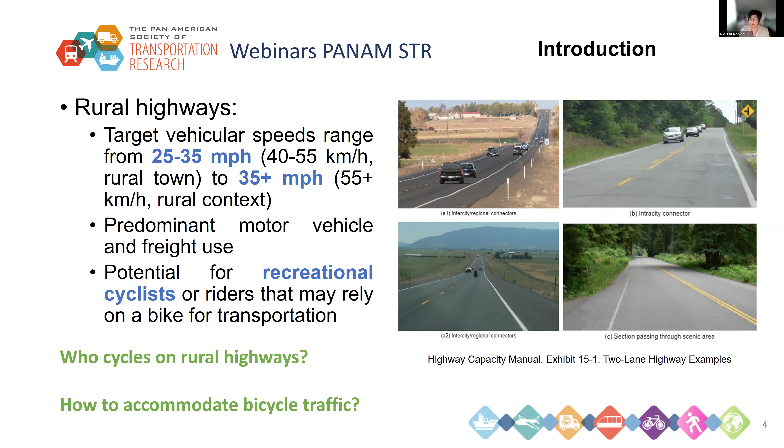Still, there's also potential for recreational cyclists who want to cycle on rural highways, and also riders that might rely on the bicycle as their only transportation mode. So we're not talking only about leisure cycling, but it can also be commuters or other purposes that use the bicycle. The main question is actually who does cycle on rural highways, in the context of the US, and how can we accommodate bicycle traffic on these types of roads?

How this has been done in the past is that we have different design guidelines, in the case of the US, that were developed to see which are the most suitable conditions for cycling for a specific design user profile.

What I'm bringing here is the FHWA bikeway selection guideline that, for the rural context, says how the width of the shoulder should be, between 1.2 or 1.5 meters and almost 3 meters, depending on the vehicle speed and also the volume. The more volume and the more speed, the higher the accommodation should be for bicycle traffic.

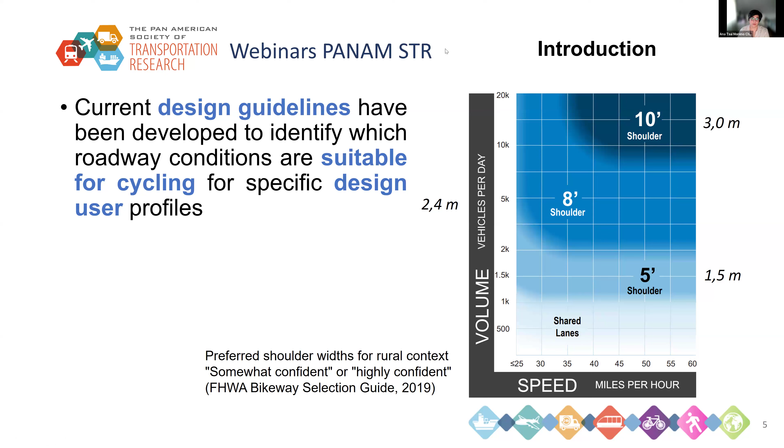We said that it depends on the target user. This is a new concept that's been implemented in the US for almost the last 10 years: not targeting the entire population, but targeting a specific user segment. Those segments are based on comfort level, bicycle skills, or experience.

In the case of rural highways, we cannot imagine that all the population would cycle on a rural highway. So all this design criteria implemented in the past is targeting the most confident groups. In the case of FHWA, that's the somewhat confident and the highly confident. Looking at population percentages, we're talking about 10 to 16% of the total population. So it's a niche, I would say - it's not intended for all cyclists or all the population to cycle on rural highways.

All this distinction based on the level of confidence follows the approach of the level of traffic stress. This approach started in the 90s with Sorton, who proposed whether a facility was adequate or inadequate for a cyclist based on their own perspective.

It gained popularity in the last 10 years after the Mineta Institute started creating easy lookup tables to define the design criteria. These are basically mainly based on expert opinion.

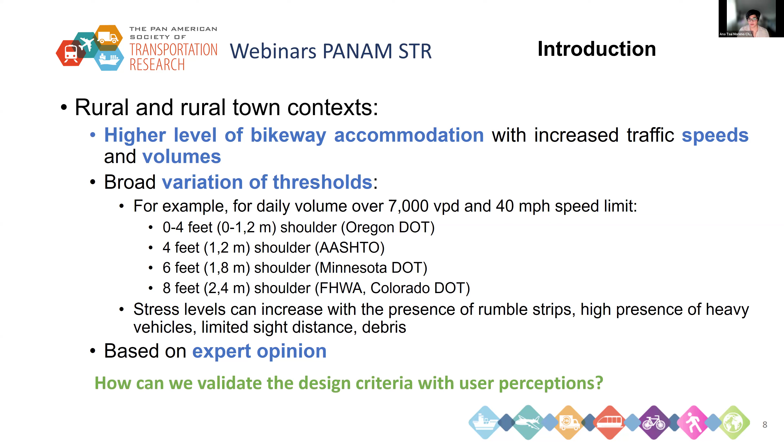So the main question here is: how can we validate these design criteria not only based on expert opinion, but with user perceptions? This is what brings us to our objective today - to develop a framework to derive design criteria on rural highways based on empirical data.

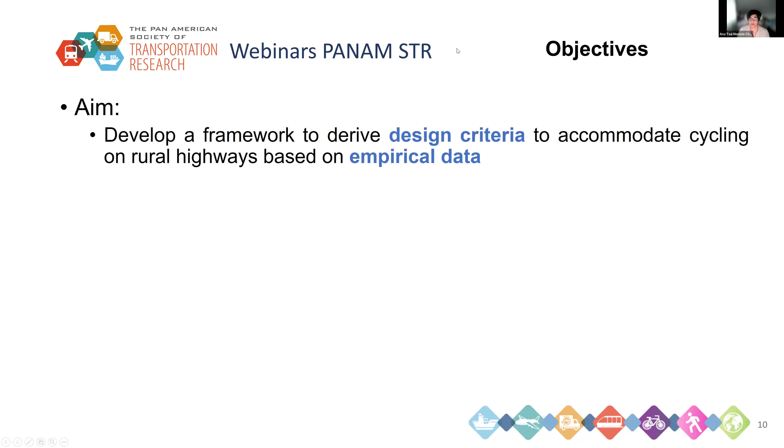To achieve this aim, we have a series of subsequent objectives. First, design the survey to know and gather which variables influence people's decision to cycle or not. Then distribute this survey to collect opinions from actual cyclists, along with their attributes and characteristics. From there, estimate individual preferences.

Lastly, develop recommendations for the level of traffic stress based on user perception. To the best of our knowledge, this will be the first attempt to derive design criteria based on user perception and empirical data.

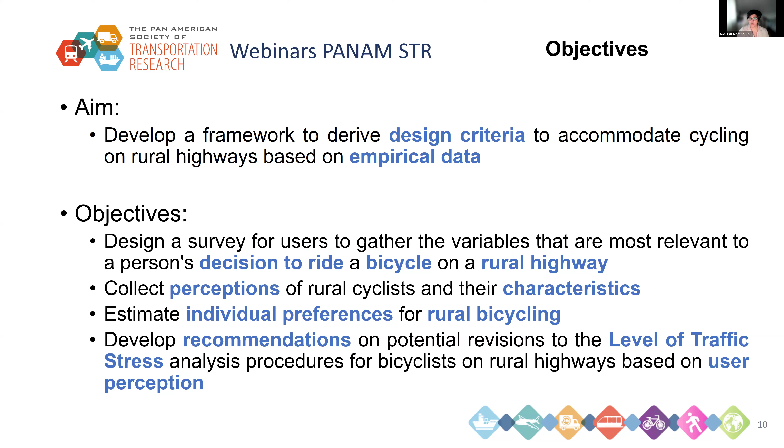What we can see is that all these methods have been developed concurrently over time, so there isn't an official position on whether to use level of service or level of traffic stress. There's a lot of debate on which one to use and which is more appropriate, because all of them have been developed concurrently.

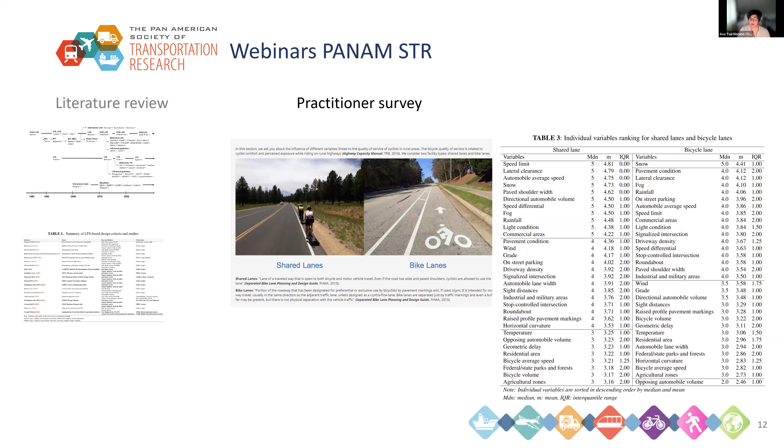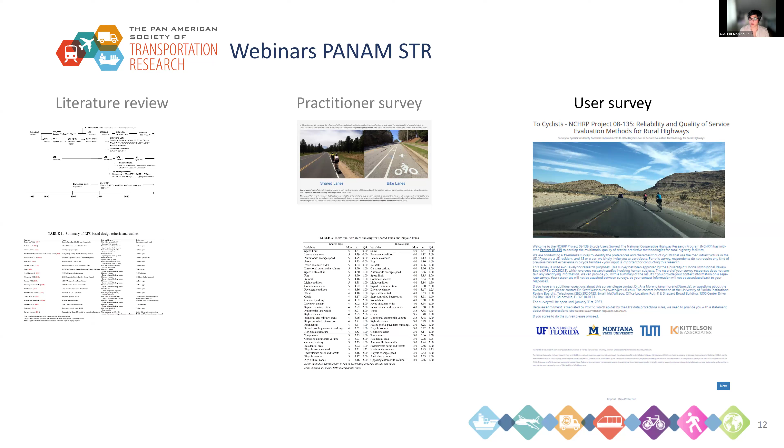Based on the practitioner survey, we developed our user survey, which is what I'll talk about today, because it involves empirical data with user perceptions. This survey was part of our NCHRP project with our partners. It's a stated preference survey conducted online, and the main objective was to identify the variables relevant for a person to decide whether to cycle or not on a rural highway.

The survey has different pieces, but what I want to talk about today are the choice experiments that were developed. The survey was pre-tested with the team and project partner members, and had approval from the University of Florida IRB. After that, it was distributed online to cyclist associations, social media, UTCs, state DOT bike-ped coordinators, and different committees at TRB, since our sample target was in the US.

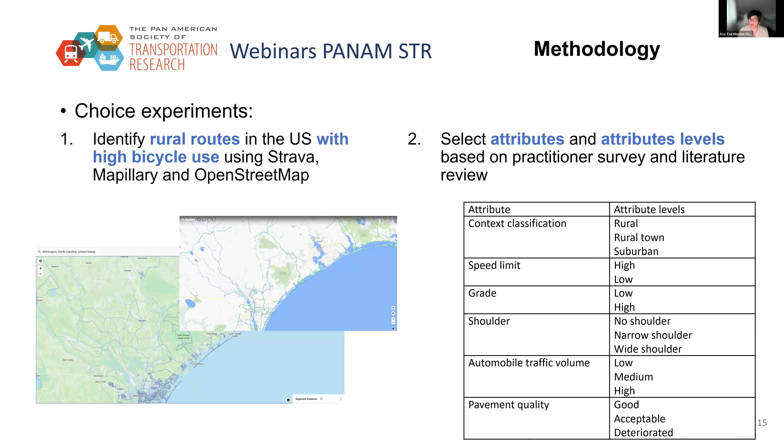We have 6 attributes to combine for our choice sets, each with 2 to 3 attribute levels. If we did all combinations of these 6 attributes with their levels, we'd end up with 324 alternatives—something not feasible for a participant to analyze one by one.

So we used fractional design to reduce the choice task dimension from 324 alternatives to 16 representative alternatives. And these are the ones that you can see here on the slide. They vary the context class between rural, rural town or suburban, a speed limit low or high, the grade or terrain, the presence of a shoulder, automobile volume, and pavement conditions.

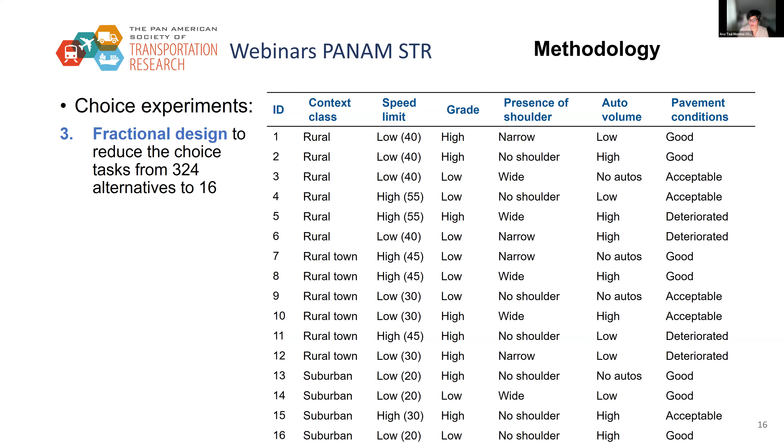So these were the descriptions of the different scenarios, but instead of showing each person a description, we showed them a picture. And how we created the picture was retrieving video images from Mapillary to create those hypothetical scenarios, using streets or highways from the US. And then we edited the speed limit signs, automobile volumes, and also pavement conditions.

And here we have an example of two of these choice sets, and one would be image number 4 that had no shoulder, low traffic volume, a high speed limit, acceptable pavement, and the terrain is level. And then on the other one, you can read them faster. So here we can see the differences that were edited for the people.

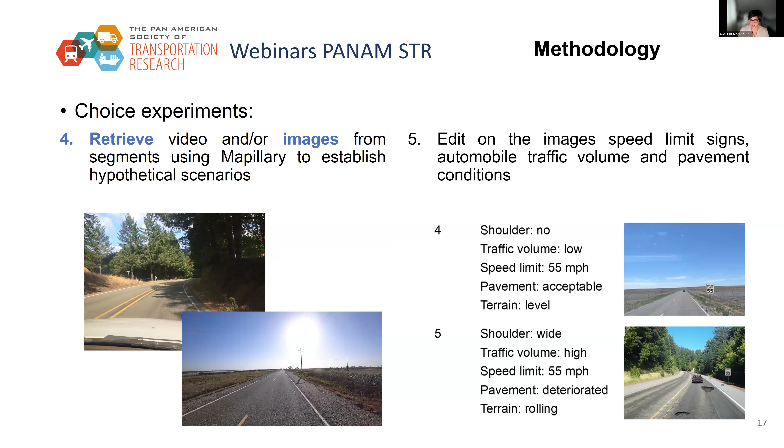So once we created these 16 scenarios, we implemented all of them in our LimeSurvey, and we divided those scenarios in 4 groups of 4 choice tasks. So each choice task had 4 alternatives, and those groups or choice sets were created randomly. So each person had a different order and a different arrangement of the choice sets, but each person was able to see all 16. That was ensured in our code.

In order to increase the sample size, we did the choice sets twice. So each person had to do 8 choice sets in total.

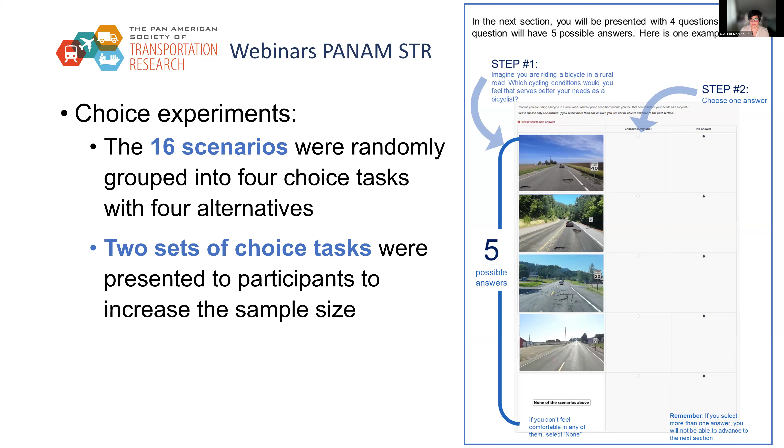And for the modeling framework, here comes the specific improvement compared to the NCHRP project that we were working with: instead of using multinomial logit or nested logit, we went to a mixed logit model. In this case, the mixed logit model used a distribution of the taste parameters for the design attributes over the entire population, and that distribution was assumed to be normal. So instead of having just one for each segment of the population, we have an entire distribution of the taste parameters. So they were at the individual level.

It was estimated using Markov chain Monte Carlo methods in Biogeme, and this is useful when we have multivariate distributions that are unknown. Specifically, we were able later to evaluate individual level taste parameters. After the estimation of the mixed logit model, we have all these distributed taste parameters, and using simulations, we were able to derive the individual beta value for each one of the parameters for each one of the persons. This methodology was previously used by Hensher to evaluate willingness to pay estimates for each person individually.

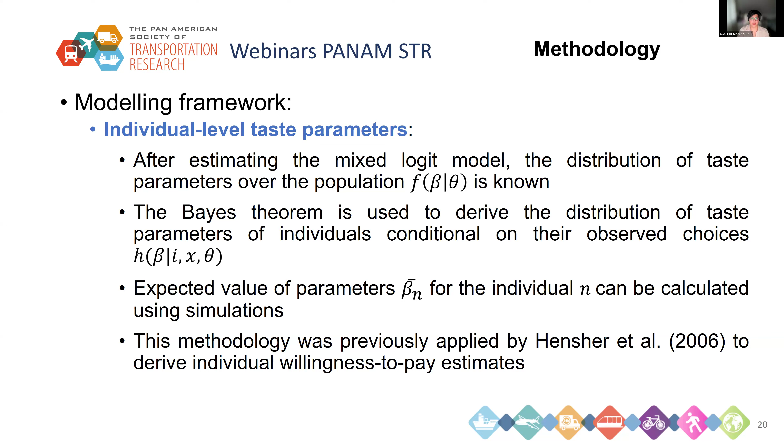And when we look at the confidence level, because we asked the persons how they would best describe their confidence level, most of them said enthused and confident and also strong and fearless. So almost 80% of our sample were on the confident side, which is actually the target user of these design guidelines. Still, we also have 20% of the respondents who were less confident, and we can say that they might rely on the bicycle for transportation, but they would be cycling on a rural highway. And this distribution seems plausible for individuals cycling on rural highways, based also on previous literature.

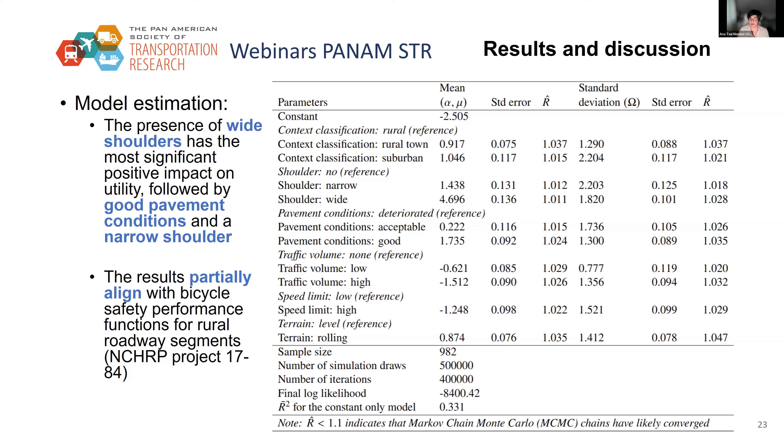When we look at these values, they align with the bicycle safety performance function for road segments that was developed in another NCHRP project for the US. So we are confident that our results go in the appropriate direction. And then after looking at these mean values, I'm going to have the representation of these values, which will be easier to grasp. And what we're seeing here is the distribution of the individual preferences of these attributes.

So after we calculate the mean value and their standard deviation, we use simulation to provide a beta to each one of the persons in our sample. And here is how the betas are distributed across the sample that we had. What we can see is that most of them have a bell shape. So the assumption of the normal distribution holds for most of the attributes. Only when there's a narrow shoulder, we have these two peaks present. What it implies is that for some participants, having a narrow shoulder was worse than actually not having a shoulder. But all others function as we might expect.

So when we have a wide shoulder, it increases the likelihood. The pavement good also increases the likelihood. And when we have higher volumes, we have negative betas. So higher volumes will decrease the likelihood of being selected. And this analysis is done now at the individual level. So for each one of the individuals, we have their betas and it's calculated at different distributions.

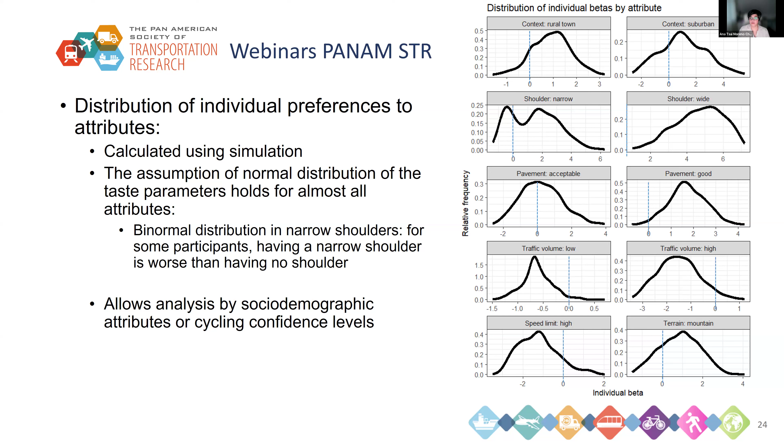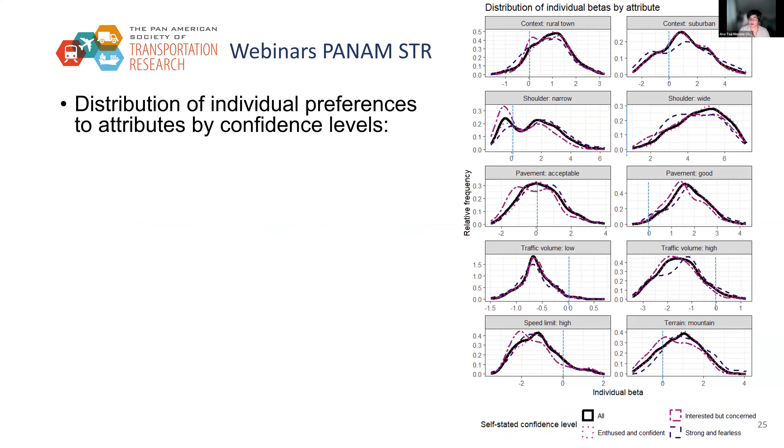What we can observe first, when we look at the traffic volume, all of them kind of overlap. So we cannot see significant variation across the different cyclist types in the case of low traffic volume. And then if we look at the speed limit high, we can see that the pink one is a bit different than the other two. So we can say that the impact of high speed limit does not change for the two most confident groups, but it only affects the one that is less confident. So it's also important to see that for them, it doesn't make a difference.

When we look at the most confident group, they also have a unique distribution for the high traffic volume, suburban context, and wide shoulders, which also makes sense, because if you are the most confident, the likelihood of cycling when you have a wide shoulder might be smaller than the effect it will produce for the least confident groups. And in this case, both interested but concerned and also enthused and confident have a similar taste for the shoulder width.

And we also saw other ones where all of them differ. So there is not a clear trend where two of them overlap, but all of them are different, and they follow an expected pattern. So when we have good pavement, the ones with a higher effect will be the least confident compared to the most confident. So all of these make sense, but we can see that there's no trend that is unique across all of the different attributes.

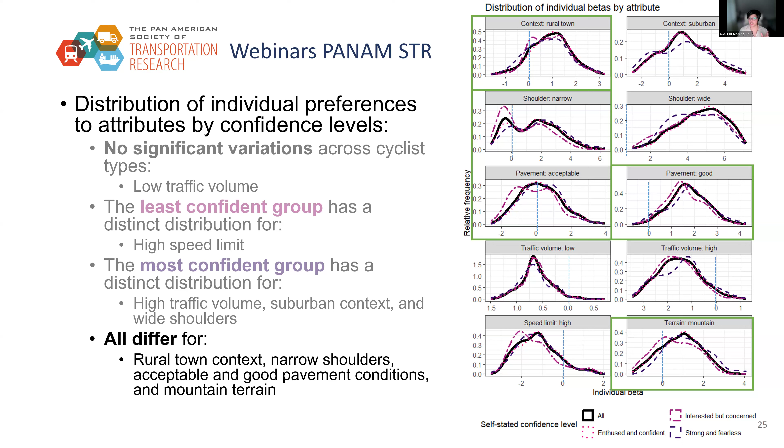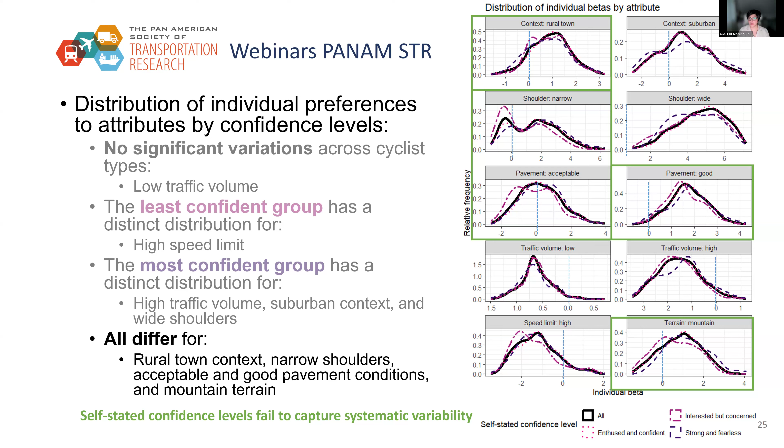And here, what it comes to say is that the self-stated confidence level fails to capture this systematic variability. So if we had a unique mean value for everyone in one confidence group, we would not be able to see these differences, because for some cases two groups overlap, and for other cases they do not. So this approach produces more accurate results than having a unique value for each segment class.

And after looking at each one of the individual values and betas, we calculated the propensity to cycle. So here is the probability of a person choosing to cycle on a specific combination scenario with all the attributes. And then this can be used if we want to do sensitivity analysis, if we start varying certain attribute levels.

And we use it here, for example, for the context class, where we can see the first thing is the difference by shoulder is the one that gives the most different shapes of all these propensities to cycle, meaning that the wider the shoulder, the more the differences for different context classes are minimized. So we can see that the three lines get closer to each other.

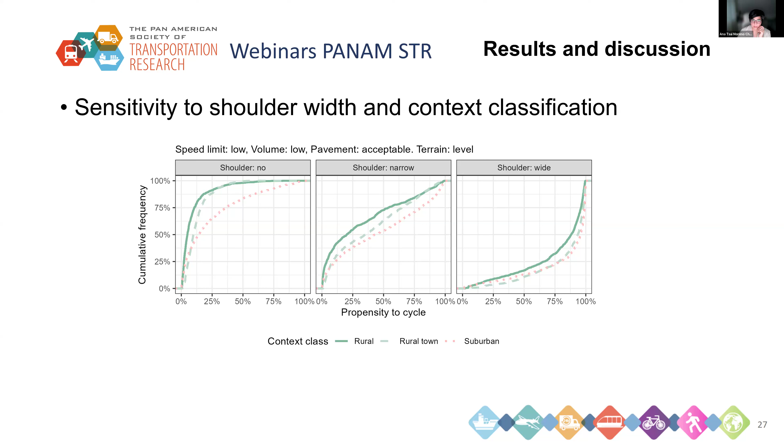In the other case, when we have no shoulder and we are in a suburban area, it's much more likely that you will choose to cycle. But in a rural area or in a rural town, people will not dare to cycle there because the propensity to cycle is pretty low in that scenario. And we can have similar analysis for other attributes.

Here we can see with the pavement condition fixed, also the rural class fixed, and the level terrain, the impact of playing with the high speed limit and also traffic volume, and also the shoulder width. As we saw before, the presence of the shoulder and its width is the one that changes more dramatically the shapes of the propensity to cycle, and the differences across the traffic volumes are minimized when we have no shoulder and high speed.

So regardless of the traffic volume, we will have, in all the cases, really low propensity to cycle. That's different when we have a wide shoulder and a low speed limit; then we will see differences. So the higher the traffic volume, the lower the propensity to cycle.

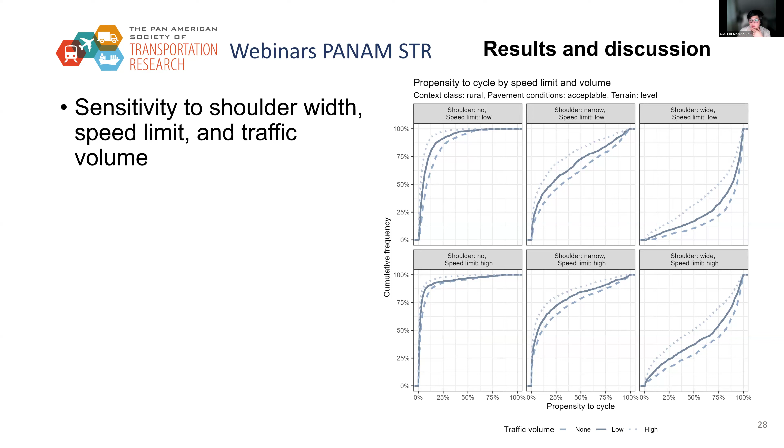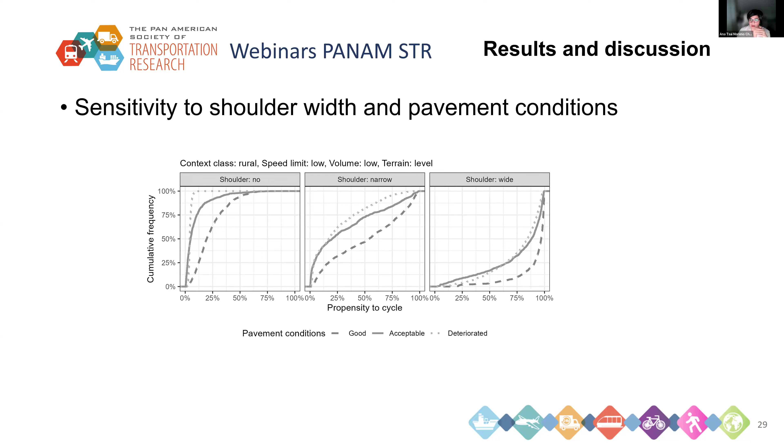Similar analysis could be done with the pavement conditions, which here is quite interesting. When we have a wide shoulder, it's only different when we have a good pavement condition, but when they're either acceptable or deteriorated, it doesn't make a difference for wide shoulders. But when we have narrower shoulders, we can see these differences across the pavement conditions.

And something that was interesting for us was the terrain, because our main assumption was that if we have a rolling terrain, so more grades up and down, people would select to cycle less, because usually you tend to minimize your effort. But we found the opposite. We found that with rolling terrain, people were more prone to cycle.

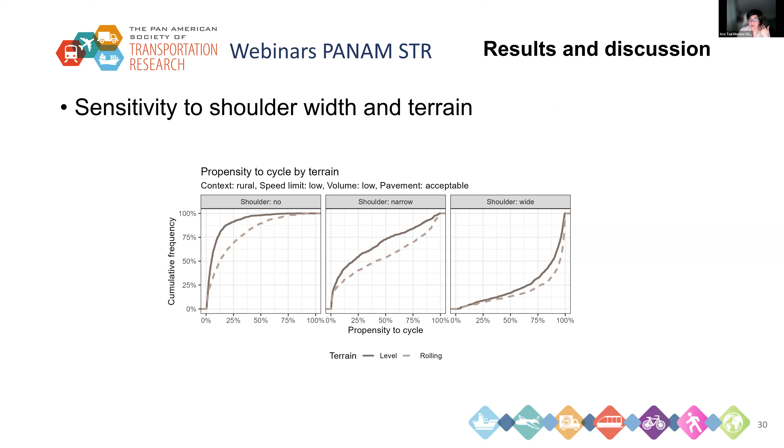And that could be because people might not have been thinking of terrain as a disutility or more effort to cycle there, but it could also be that it was fun, or that it was shaded, because it was desert-like when it was level terrain, and the others had more trees around.

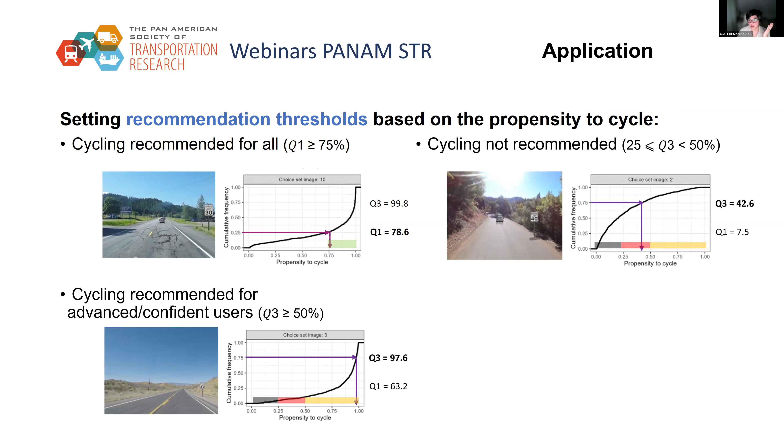When we're looking only at advanced and confident users, we're talking about the Q3, the top 25%. So the 25% of our sample that are the most confident have to have at least a 50% chance of selecting to cycle here. And this is one value that we can recommend. But if this top 25% don't dare to cycle, so their propensity to cycle is between 25 and 50%, we say cycling is not recommended here, and this will be one of the examples.

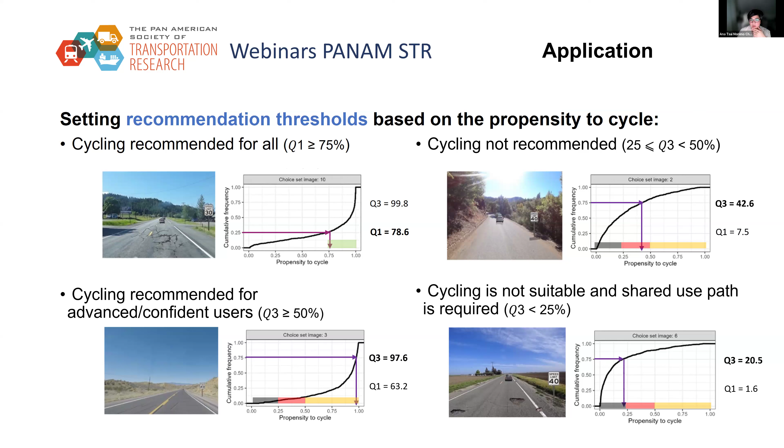But if it doesn't even reach the 25%, we can say this is not suitable. Not even the most confident cyclists will dare to cycle. So we can classify this as non-suitable, and we need to have a shared use path if cycling is going to happen here.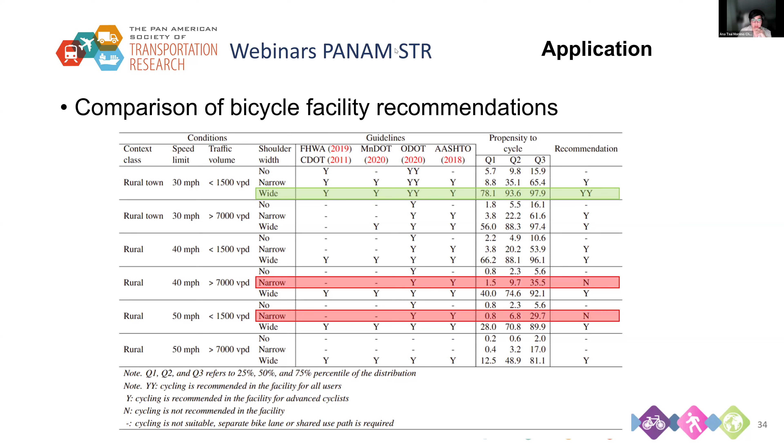So first, here was created a robust approach with empirical derivation of the recommendations for bicycle facilities in the rural context that is based on empirical data. So here we were targeting almost 1,000 respondents from the US, and this sample was aligning with the target user groups for this context, but also included 20% of the sample that can rely on bicycling for transportation. The approach that we developed uses the entire distribution of these parameters.

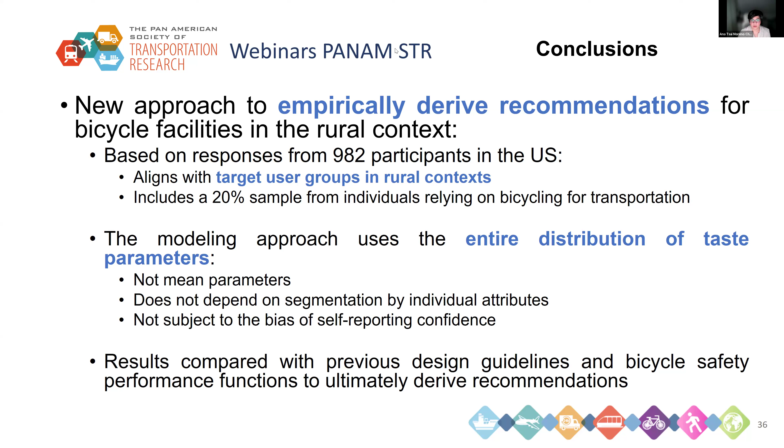So instead of the previous ones that depend on a segmentation for individual attributes and therefore are subject to bias of self-reporting, here we were producing individual values for each one of our respondents. And compared to the previous guidelines, they were closely related to what AASHTO is proposing.

The main conclusion is that our propensity to cycle is really sensitive to shoulder width, speed limit, and traffic volume, which is not surprising, as guidelines use these three elements. But also we have found a moderate sensitivity to pavement, terrain, and context class. What we also saw is that there are some inconsistencies in the individual taste parameters by cyclist type. So using percentiles of the distribution might be more representative than using a pre-segmented distribution of the self-stated confidence level.

And with this approach, we were able to derive the recommendations and all these anchoring points, and here I show what could be our proposal, which could be set flexibly by each one of the agencies if they want to have more conservative or less conservative criteria.

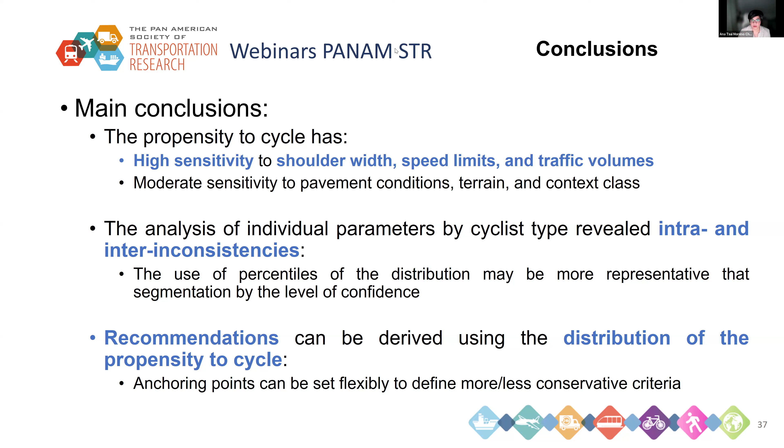There are some limitations to our research. It's limited to the choice task design that we had, and we're using still images, not video or other types of images that could produce different effects on people. Our limited sample, still almost 1,000 respondents, could be larger, and it can also have some biases toward the most confident groups. There can be some interpretation bias, where people might interpret something different from what we were implying. And also this modeling framework has an assumption that held for most of the attributes, but one was not.

And as future work, we would like to continue exploring the role of the bicycle user segments for rural highways, also increase the sample size, which will improve our model estimation results even further, and also do the expansion to other urban areas and also to other countries, because it will be really interesting to see if these taste distribution parameters hold in the US compared to Europe or compared to South America.

And then the last piece will be to discuss these anchoring points, because this is our assumption that we defined: this Q1, Q3, and the 75%, etc. But it will be open for discussion to do that with other practitioners.

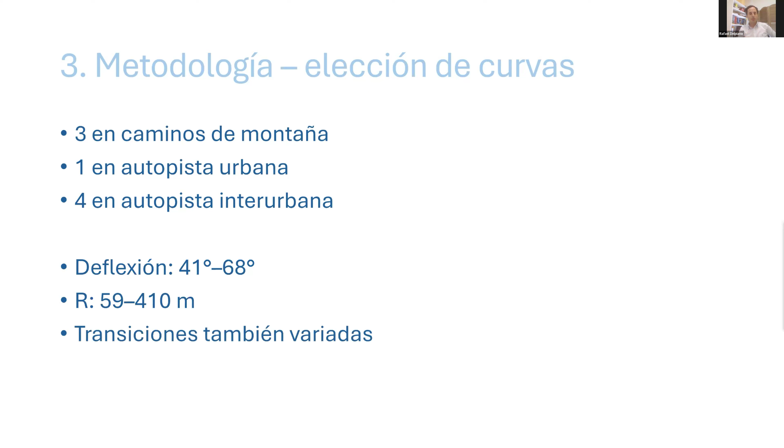La metodología, sin entrar en mucho detalle, consiste en grabar y sacar fotos mediante un dron, verticalmente desde arriba de la curva, en video cenital, con fotos georreferenciadas. El video se procesa y mediante el software Data from Sky se extraen las trayectorias primero en coordenadas del video, y después se traducen a coordenadas geográficas. Para mayor precisión, mediante las fotos georreferenciadas se construye una maqueta 3D con un software de reconstrucción 3D que alimenta la calibración de esa traducción de coordenadas.

De la misma maqueta 3D se extraen las curvas. Aquí manualmente hubo un trabajo de otro estudiante que fue marcando en la maqueta punto por punto, cada aproximadamente 1 metro, cada una de las líneas de pista y de los bordes del camino, de cada una de las 8 curvas.

Después hubo un proceso de cálculo de los parámetros de las curvas a partir de esa extracción, y mediante un programa de desarrollo propio se calcularon las trayectorias relativas, en particular la posición lateral, que era lo que más nos importaba, relativas a la vía, terminando en el cálculo de métricas de ese desplazamiento lateral.

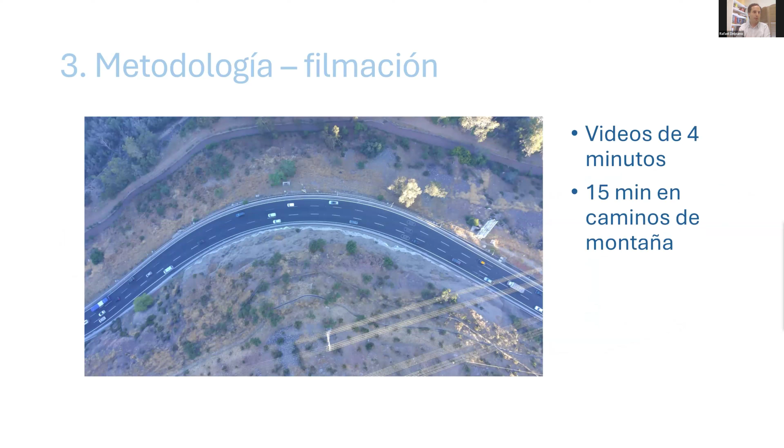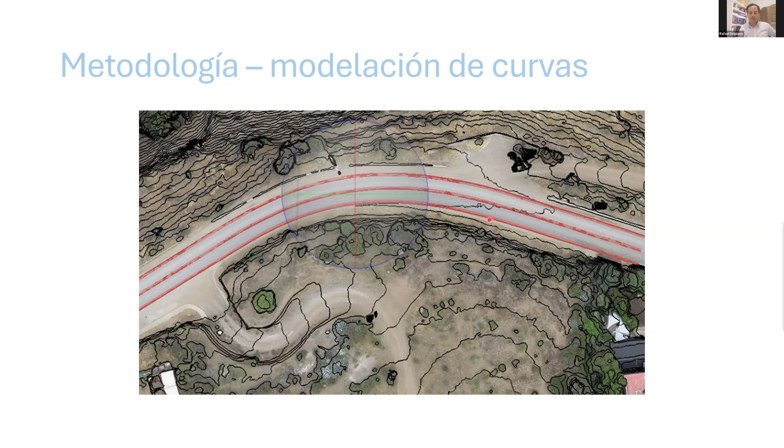Esto mediante un proceso de optimización cuya función objetivo era la raíz del error cuadrático medio de la distancia de cada uno de los puntos a la línea resultante. En general se obtuvo para cada línea menos de 10 centímetros de error, que era más o menos la resolución que teníamos en los videos más grandes.

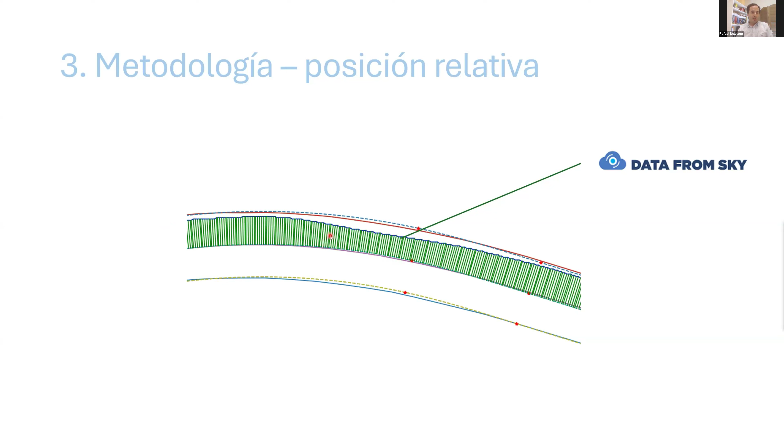Y en base a eso, automatizado para todas las trayectorias, obtuvimos las trayectorias calculadas relativas a la vía. Aquí tenemos el 0, que es la posición lateral correspondiente a la línea que limita el carril. 1 significa 1 metro de distancia de esa línea, 2 significa 2 metros de distancia, y aquí tenemos el ejemplo de una trayectoria de este mismo camino.

Que parte a una cierta distancia, cercana a 2 metros, y a medida que avanza se va acercando al centro de curvatura. Llega un momento, antes del vértice, en que alcanza su distancia mínima, y luego empieza a alejarse de nuevo para terminar la curva muy cerca de donde la empezó.

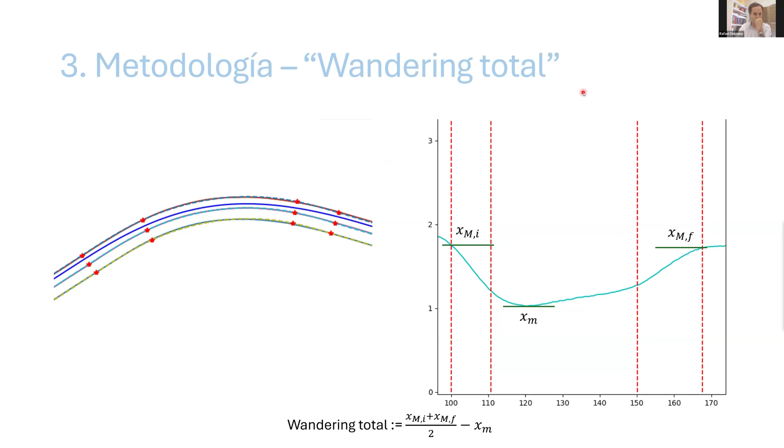Con eso también se corrigen problemas de la calibración de la curva o incluso de la perspectiva del video, y eso menos el mínimo se consideró como lo que llamamos wandering total, nuestra variable dependiente para las regresiones lineales. Entonces extrajimos el wandering total de cada trayectoria. También extrajimos otras métricas, pero esta fue la que resultó mejor explicada por los modelos.

Por eso no me voy a detener en explicar las demás. Y como variables independientes incluimos, supongo que muchos de los que están escuchando se podrán suponer algunas: el radio de curvatura, el ángulo de deflexión, al que llamamos theta, las longitudes de las transiciones de entrada y de salida. Por generalidad preferimos considerarlas distintas, aunque en teoría, por norma, en Chile debieran ser iguales; en la práctica no siempre son iguales.

El sentido de la curva: en toda curva bidireccional, los que están más cerca del centro de curvatura van a ir doblando hacia la derecha, y los que están más lejos del centro de curvatura van a ir doblando hacia su izquierda. La única excepción a esto es la autopista urbana, que es en un solo sentido, porque el otro sentido va bajo tierra.

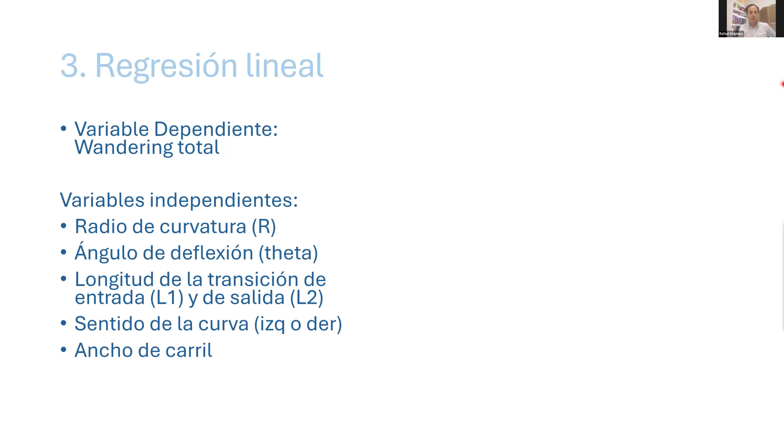Y entonces el sentido de la curva, el ancho de carril, el número de carril contando desde más cerca del centro de curvatura hacia más lejos (1, 2 y 3) como variable entera, el peralte medido en pendiente porcentual, la pendiente también medida en porcentaje, metros subidos cada 100 metros de avance, la velocidad de cada vehículo, y la desviación estándar de la velocidad de la misma trayectoria del vehículo como una medida de si cambió o no de velocidad durante el desarrollo de la curva.

Y después fuimos agregando otras variables para incluir más información y eliminar variables correlacionadas. Por ejemplo, la velocidad relativa a la media del sitio. Recordemos que son 8 curvas, cada uno de estos escenarios, y a las trayectorias extraídas del video le llamamos sitio. Y finalmente, ya voy a explicar por qué esto fue importante, pero dejamos una variable categórica para definir cada uno de los 8 sitios.